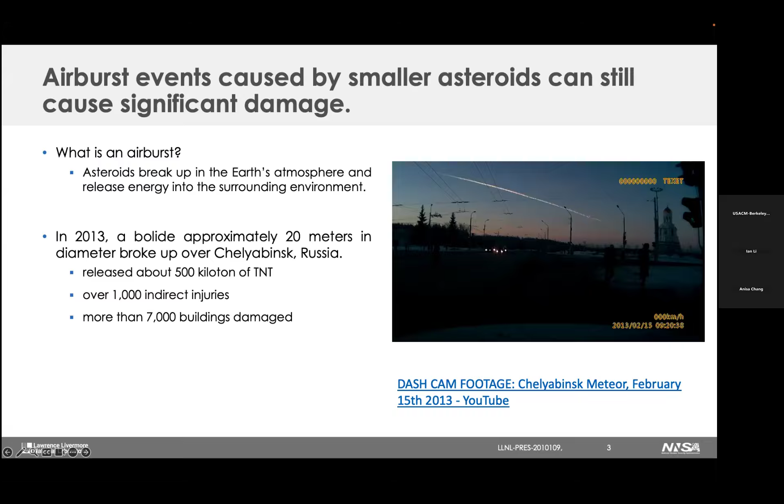And this is actually a very interesting phenomenon because it's very physics-rich. On the onset, this is a fluid-solid interaction problem as the bolide travels into the atmosphere from space, streaming at hypersonic flow velocity. So here, a lot of our physics starts breaking down. Standard gas dynamics no longer apply. Your ideal gas law fails because now you have additional energy modes to track, as air particles have vibrational and rotational modes, and you need to track those for their equation of state.

And for the solid, we're also dealing with a complex problem. Not only is the bolide burning up, it's breaking. There's a fragmentation problem, and we had to look at how more organic rocks versus more metallic rocks have a wide range of material properties that can govern how this fragmentation occurs. And there are some little samples here from Chelyabinsk and different asteroids that crashed down, and we do take them to get properties.

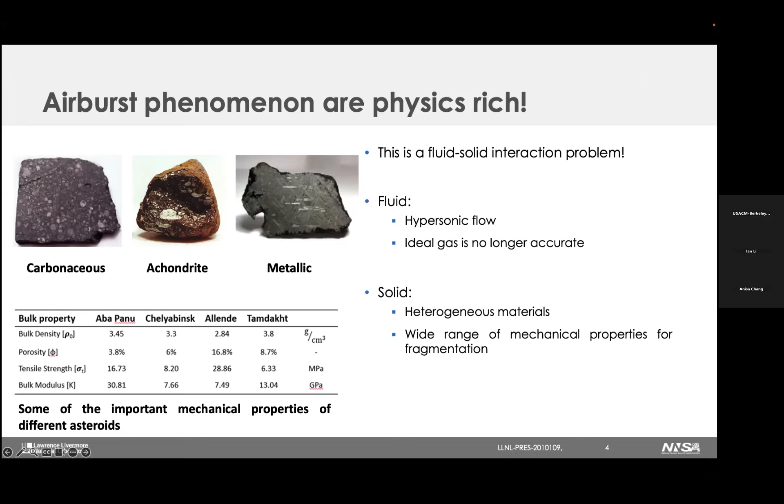And combining them all together, this is also a data-sparse problem. The Chelyabinsk photo we saw happened in 2013. The next one we have is in 1908 in Tunguska. So we're not working with something we can replicate in a laboratory and capture a lot of data points. So hydrocodes such as CTH or ALE3D, developed at Sandia and Lawrence Livermore, are our best bet at understanding what happens when a rock travels at hypersonic speed through the atmosphere and starts breaking up, because we're not finding a laboratory where we can shoot these rocks like that.

And for this particular project, I'm actually moving out of the finite element world and into the mesh-free land of Spheral++. Spheral++ is a smoothed particle hydrodynamics code developed at Lawrence Livermore National Lab. It's open source and parallelized. And in fact, the group I'm working with has developed a particular fluid-solid interface solver there to work with materials with dissimilar density. The air and the bolide density are going to be extremely dissimilar. And traditional SPH has some limitations, struggling with how to reduce artificial surface tension.

So going back to jump the gun, that's just the video being played in here. This is the SPH simulation of a spherical asteroid going through as a bolide as it breaks up. And I put it on loop. You guys see it expand. I think Shen put that on the poster for everyone to see here. And that's cool and all, very well done in Spheral.

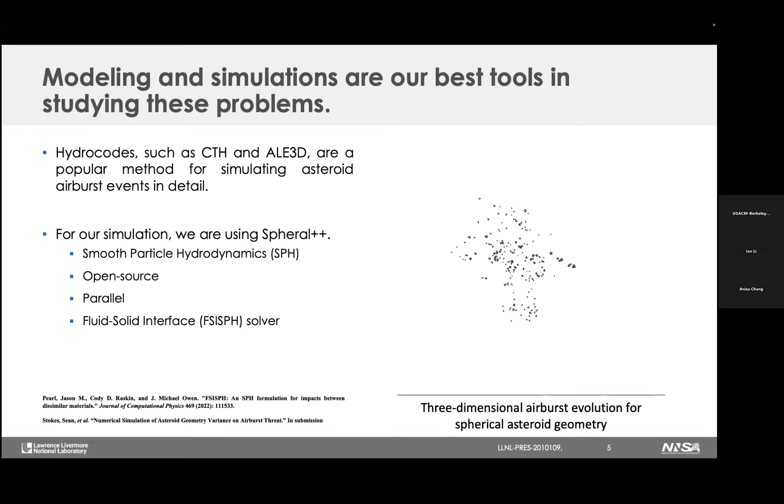But as we all know, hydrocodes have a catch. And the catch is, it's expensive. That particular three-dimensional simulation took more than 1 million CPU hours to solve, which is why Livermore had their own little power station and water cooling station to support their computing facilities. And even for a 2D simulation where you just have one set of inlet conditions, with air particles screaming in, hitting a particular bolide solid here, this simulation still takes about 10,000 CPU hours.

And people who are a little bit more clever might see a little reload here, because I actually had to run a restart file on these, because they don't even run in a full 24 hours. So, but these simulations are great because they're high fidelity. We're tracking both materials simultaneously, but sometimes we might want something faster.

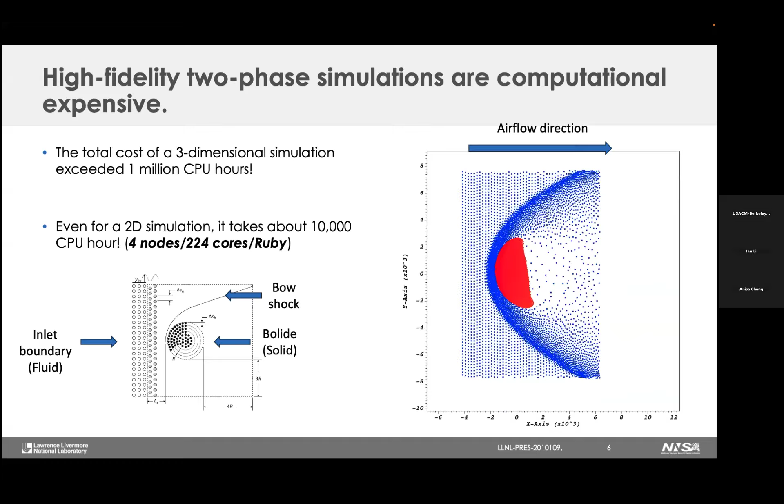And this is where we can take advantage of looking into the physics and trading away fidelity. We don't need to have the most high fidelity simulation if we can have some acceleration in our computational speed. Folks have done this before. I think Rulko from MIT has done this, where instead of explicitly simulating the whole bow shock that develops from the bolide, we are able to use the gas dynamics by replacing the bow shock with a surface traction force.

Before, that was a full fluid-solid interaction problem. Now this is turned into almost like a compression test. It was noted that at the start, still under the linear elastic regime, it looks like a Brazilian disc compression test. It had the exact same kind of stress, where you have the body force kicking in and the surface traction force compressing the body. And this simulation runs a lot faster, about 100 CPU hours.

But as you notice here, this particular deformation mode looks a lot different, right? We start getting the tips to shred off, and this whole deformation mode no longer looks the same. And that's because the assumption that led us to replace the bow shock with surface traction forces is failing. As the disc started to undergo finite deformation, higher order effects started to kick in, and we can no longer make such an assumption.

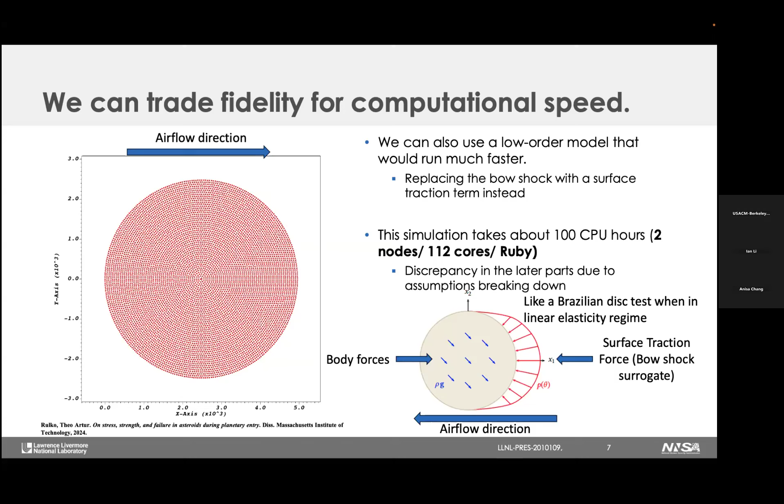My goal for the summer was to develop a physics package that can take advantage of this lower order simulation. We can run this compression test and develop some sort of handoff techniques, such as, what if I ran this for 2 seconds? What happens if there's 1% kinetic energy loss? And once I have some criteria to decide which regime I'm living in, and whether my surface traction assumption has broken down enough, I will transition this simulation into the full fidelity model, where I can have air particles running in to more accurately capture the shape and the bow shock development.

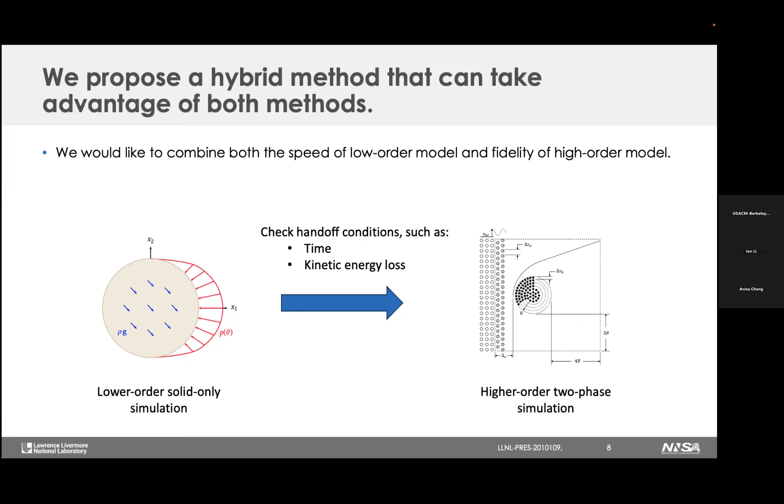So, over the summer I spent a good 2.5 months trying to develop this. The first picture to keep in mind is that both the solid-only airburst and the two-phase airburst had already been developed as individual scripts. But those two scripts don't talk to each other. Sure, we can just clutch them all together and have mysterious functions within a function within a function. That's not very productive, there are a lot of bugs, and you start sitting there trying to trace down why you're getting a memory out of bounds. What's going on here, guys?

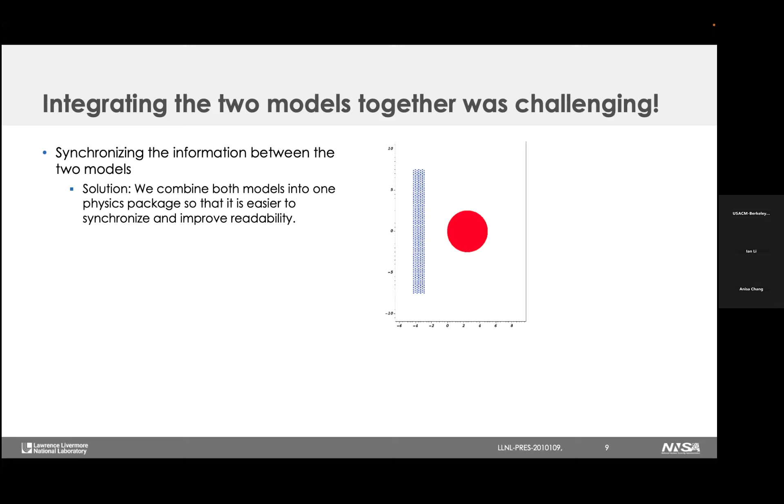So a big part of my effort initially was writing a hybrid setup script where the air nodes sit on the left-hand side, patiently waiting. Initially we apply surface traction force on this solid bolide, and it gets compressed like an elastic little ball. And once I reach my handoff condition, whatever that might be, I let the air nodes come in. A slower animation looks like this, but this animation actually has a lot of detailed physics, because not only do we need the transition to happen, we need to make sure it happens smoothly.

Because you can imagine you're suddenly releasing off all that supposed surface traction forces, then these air particles traveling at hypersonic speed, hitting your bolide, that particular thing will cause a lot of unphysical or unwanted physics. You've got a lot of ringing effect. Your bolide starts blowing up mysteriously during simulation, and you just get to look at an empty space on your visualization software.

Now that's kind of what happened, and we take advantage of what's already been developed, called soft start, which is instead of having the air particle come in at hypersonic speed, you slowly ramp up the particle. But here, not only do I slowly ramp the particle as it travels over to hit the bolide, but it slowly envelops the bolide. I also need to slowly remove the surface traction forces that were initially simulating.

But at this particular point in the transition region, it's actually very sensitive because not only am I slowly releasing off the surrogate forces that we're using to predict what the bow shock is doing, I also have to have the air particles slowly develop around the bolide without causing any additional damage.

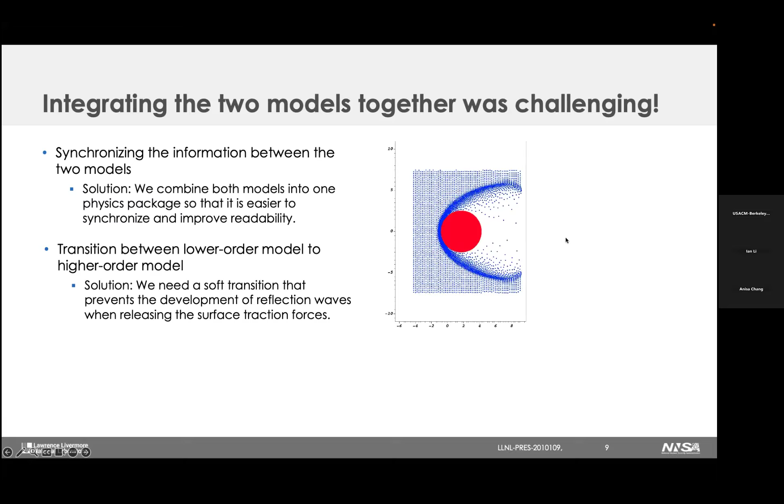A lot of things could have gone wrong here. What happens when you send the air too hard? Because SPH is a mesh-free method, there's no reason why the solid nodes should push the air nodes out. You can get air nodes embedded themselves in front of the bolide here.

But what is the formula for those forces? That will be the gas. Is it just like a rho v squared? Rho v squared, yeah, the modified Newtonian, rho v squared. We have the modified Newton. Is there a correction for tilt? I believe so, and I think we kind of use what Recode did. They do it for oblique elements, and we kind of took whatever they did for that.

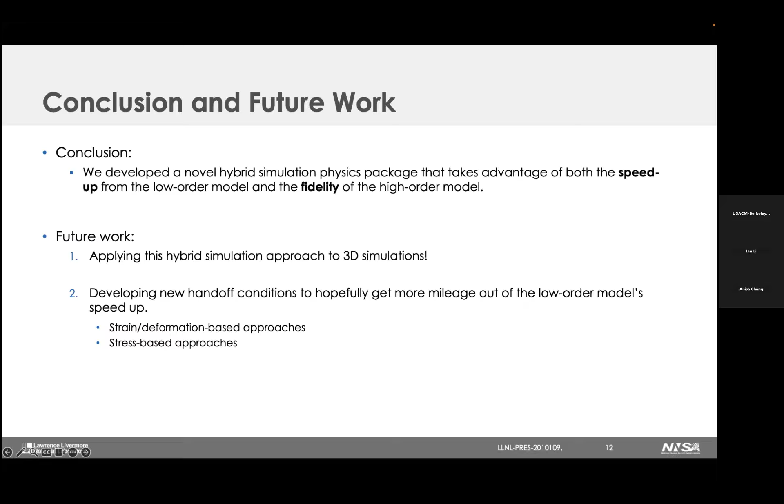Right, so just now in one of your videos in the middle, there's like a jump. The stream video - the middle one doesn't have any airflow, and then suddenly there's airflow. This part, like that? This one?

Yeah, so this airflow initially was just running a solid-only hole, so all the air was pulled up onto the left-hand side. But we still had to have air nodes initiate in the simulation at start due to the program implementation. What I'm trying to say is you only push air at the actual center - only when we say we're handing off does the air get pushed through. Or else the air just sits there.

In this simulation right now, are matching - because we only have traction forces until the handoff condition, then the air nodes can enter the high fidelity simulation.

So on the second simulation, when you see the damage particles, does it come from the initial impact? These guys came from the initial damage of the airflow. These guys are from the bow shock. The back is correct - back is the more physical damage because you now have a bow shock in the front, and the thing began to compress.

But why doesn't this side have the initial? This one? Yeah, so this one we were able to initiate the airflow very early on. Also, when this bolide's airflow was initialized, it had not yet undergone damage, so it had higher strength, and I didn't need to play with the surface force coefficient.

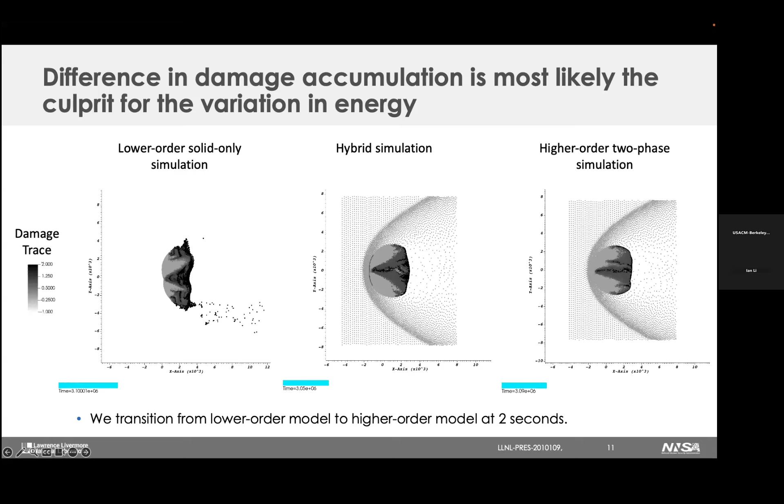I'm not sure whether you plot it, so for example there's one slide you showed, is it the horse?

This one I actually visualized with tessellation, so it's like a point for each particle. And there's no points in these regions.

This is what I'm trying to say, because in regular air, everything is enclosed, right? As long as it's really hard to create a vacuum, because vacuum means you're gonna suck all the air inside. Yeah, so...

More of an estimation of different angles and trajectories, and this is definitely a limitation. I think that's why they even have the full setup of this FSI SPH, because again, like you said, the solver material and all that, it's artificial surface tension. A little pressure here is going to cause a lot of issues. I think that's something we push through.

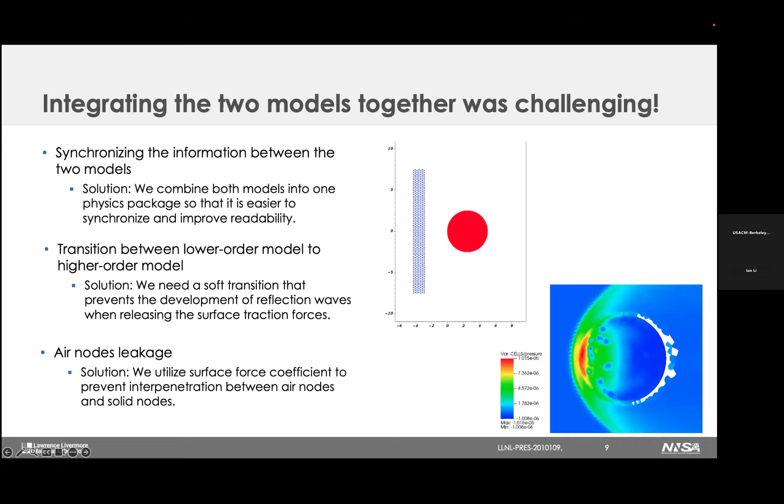The thing is, you have a straight line where you use the transition, right? If you modify that time, the results will change. Yeah. No, I only ran one, at 2 seconds. Sorry, I think I misunderstood that comment. If I shift that line to a different point.

I think one time I shifted to a very late handoff. The air comes in when the solid just completely disintegrates the moment it comes in. We have a very, very conservative kinetic energy, I think less than 1% type of handoff there, just to be able to have it safely transition.

This one, I cheated, because I ran both the full-scale simulation and the solid-only simulation. I put them side by side in VisIt, clicked through time steps, and said, I think at this one they still look identical, and this is as far as I can go. So that's why there's this mysterious 2-second pick, because I had already crunched out the true solution and was backtracking to see how well the hybrid model would perform.

It's very nice, obviously, that the modes look similar in the long term. How much does it matter how closely they match? Because I don't have a gauge of this problem. I asked my mentors, and their response was there's some sort of stochasticity inside their own fracture model, where they use a Weibull distribution. So there's some stochasticity there.